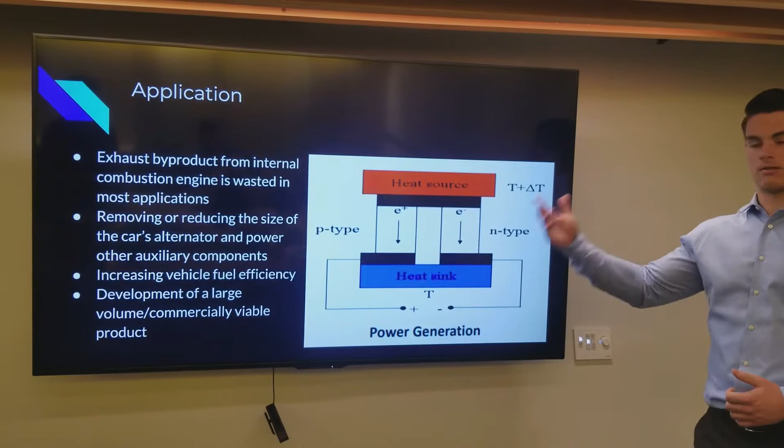So the application: there's a lot of exhaust byproduct from an internal combustion engine that's just wasted to the environment. That's a lot of heat that could be used to power other systems, such as a car's alternator. If we can use the heat from an exhaust system to power the alternator, it'll increase the vehicle's fuel efficiency.

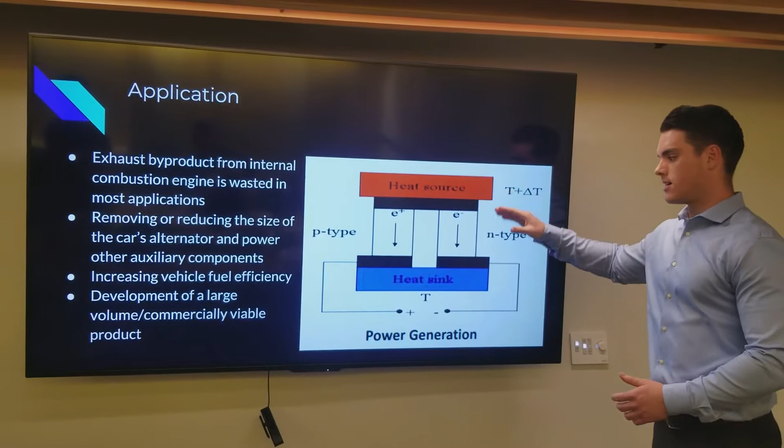It's real simple: a thermoelectric generator just takes a difference of heat and outputs a voltage. The higher the difference we can get, the more voltage we'll produce. The problem a lot of companies have run into when developing products like this is the viability of producing a large volume, commercially viable product.

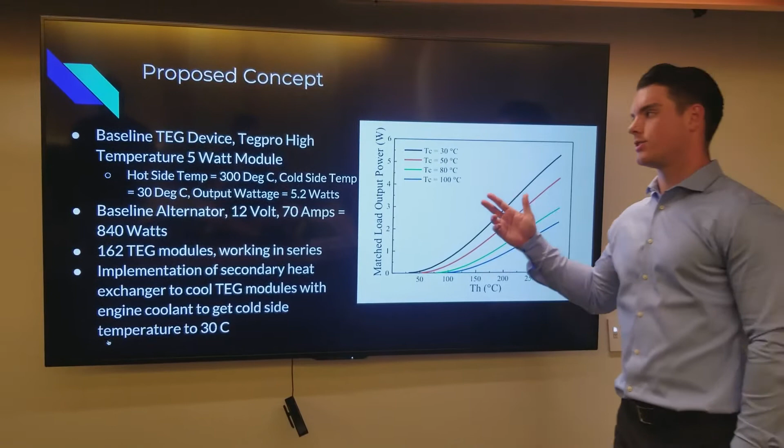Okay, this is our proposed concept. We chose a baseline thermoelectric generator device: the Tegpro high temperature 5-watt module. It can withstand higher temperatures than 300 degrees C, because we understand an exhaust system goes above this, but the highest temperature it's going to register is a hot side temp of 300 degrees C. So we went off of this for our calculations.

The cold side temp is a 30 degree estimate, and we did this because implementing a secondary heat exchanger to cool the thermoelectric generator with the engine's coolant will get the temperature down to this level. This is important because, as you can see in this image, the colder you can get the cold side of the thermoelectric generator, the more output power you get. After calculating that, we determined we can generate 5.2 watts of energy.

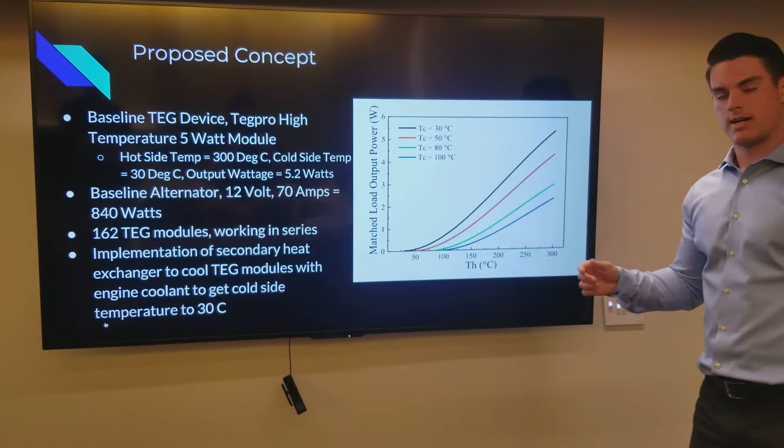We chose a baseline alternator: a 12 volt, 70 amp generator, about 840 watts, which we found from AutoZone. Using that, we determined we need a total of 162 thermoelectric generator modules working in series to get enough energy to power our alternator.

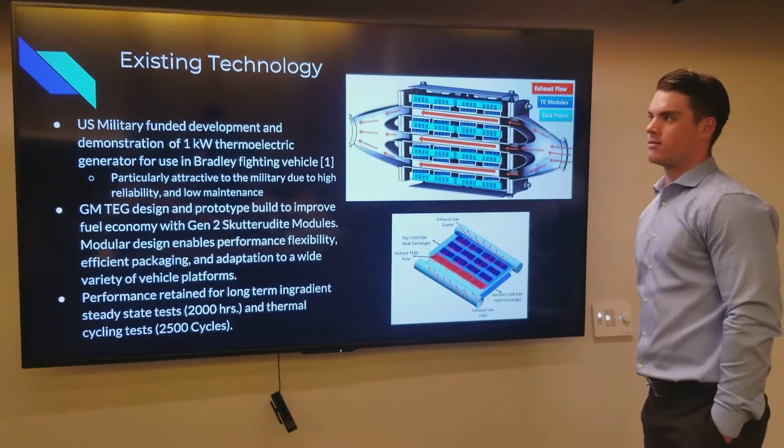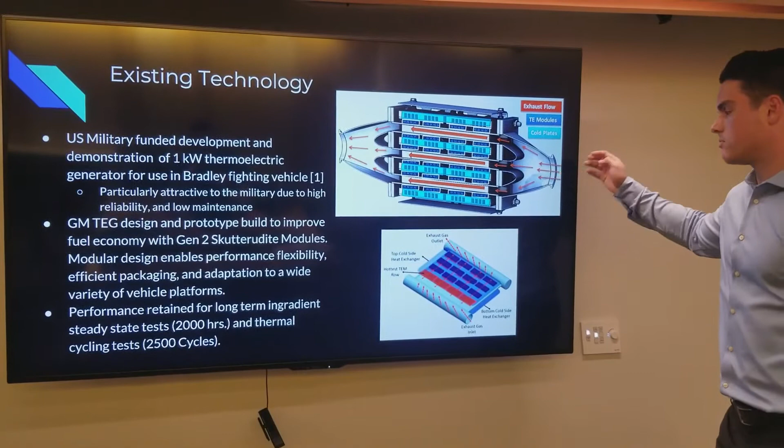Here's some background on existing technology. The top image is a US military funded and developed product: a 1 kilowatt thermoelectric generator used in their Bradley fighting vehicle. It was particularly attractive to the military because it was highly reliable and had very low maintenance. As you can see, they split the exhaust so you have more contact between surface areas of the thermoelectric generators.

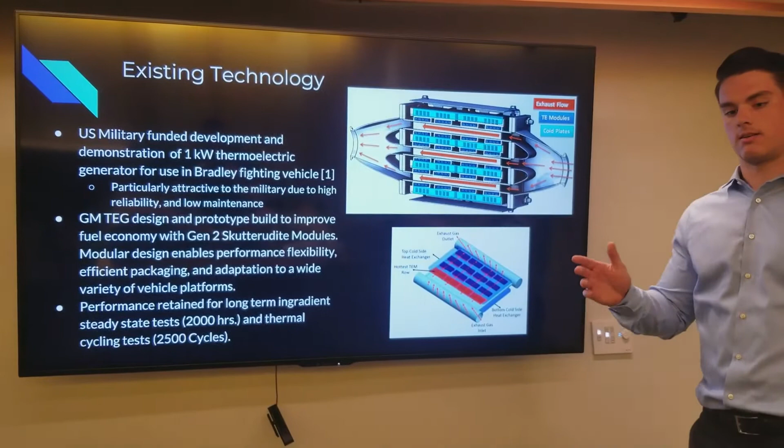Another study was done by General Motors. They did a thermoelectric generator design and prototype build, which helped improve fuel economy with their Gen 2 Skutterudite modules. It was a modular design that improved performance flexibility, gave efficient packaging, and adaptation to a wide variety of vehicle platforms. This was important because GM has a number of different vehicles, and they wanted something easily compatible with every model. This is an image of that model here.

As you can see, they followed a similar design where they split the exhaust, but it was also flexible. A cool thing is they were able to wrap the exhaust system with these to give more surface area contact with the hot side.

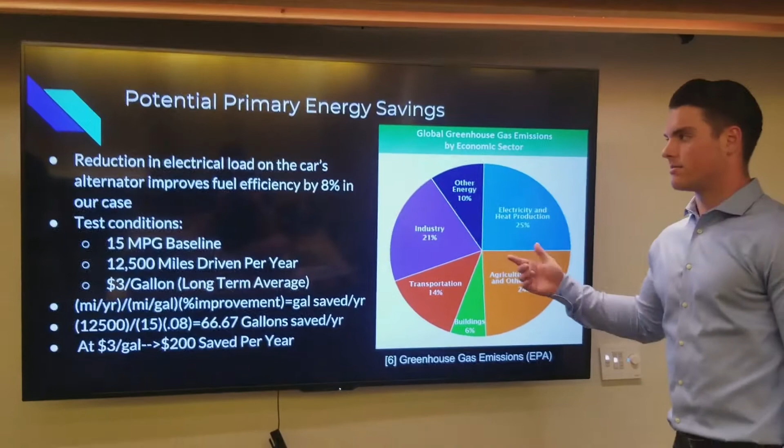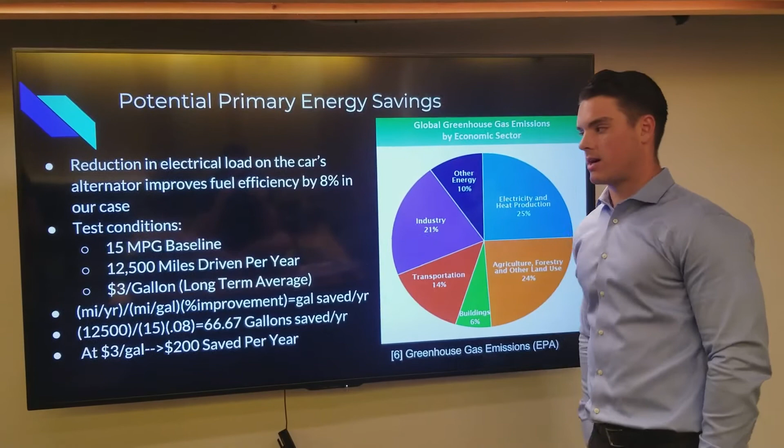So these are some calculations we started to do. Based on research we did, specifically on the US government site, we determined that reducing the electrical load on a car's alternator increases fuel efficiency by about 8%. Some assumptions we made: we used a 15 mile per gallon baseline, and 12,500 miles driven per year as the national average, while trying to stay conservative on a lot of our assumptions.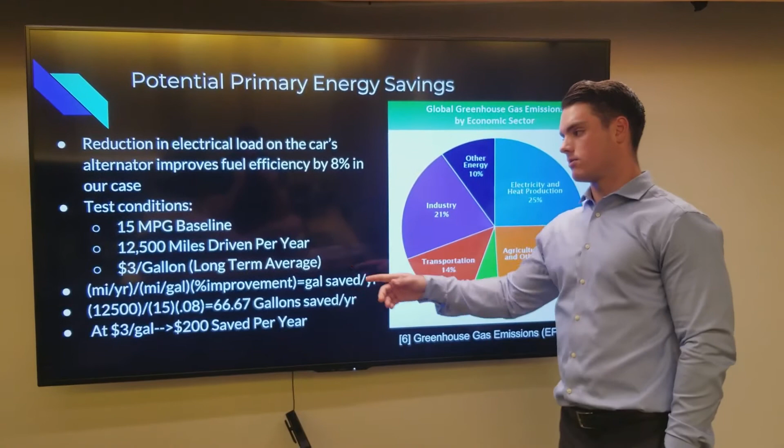If you drive more than that, you'll decrease the simple payback time and get your money back quicker. We also assumed $3 per gallon is a good estimate. The first calculation is to determine the number of gallons you'll save per year: divide the miles driven per year by the miles per gallon, then multiply by the percent improvement. We calculated you'll save 66.67 gallons per year, and multiplying that by the price of gas over the past 10 and future 10 years, we determined you'll save approximately $200 per year.

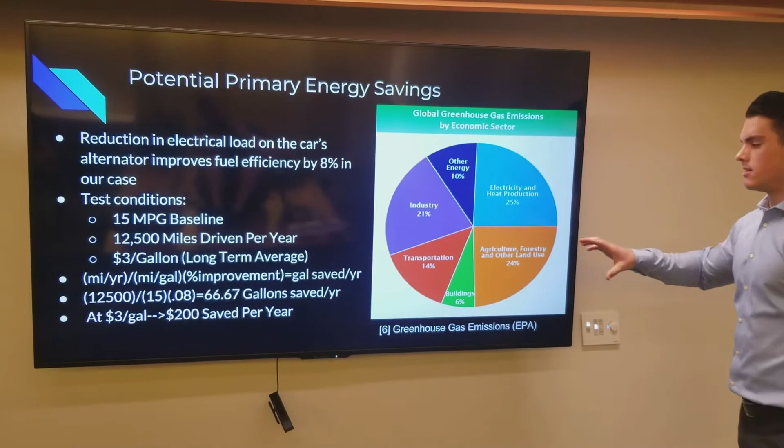This image is important because it shows the percent of global greenhouse gas emissions by each economic sector. We're in the transportation sector, so 14% of global greenhouse gases are produced by cars and vehicles driving on our roads.

In summary, our idea is pretty simple: we want to take waste heat from a car's exhaust system and use it to power a thermoelectric device. To increase our delta T, we'll take coolant from the radiator, and increasing our delta T creates the largest voltage output. With that voltage output, we want to partially relieve the alternator's load from the vehicle, increasing fuel efficiency by about 8%. We want to do further testing to determine how to decrease the simple payback period.

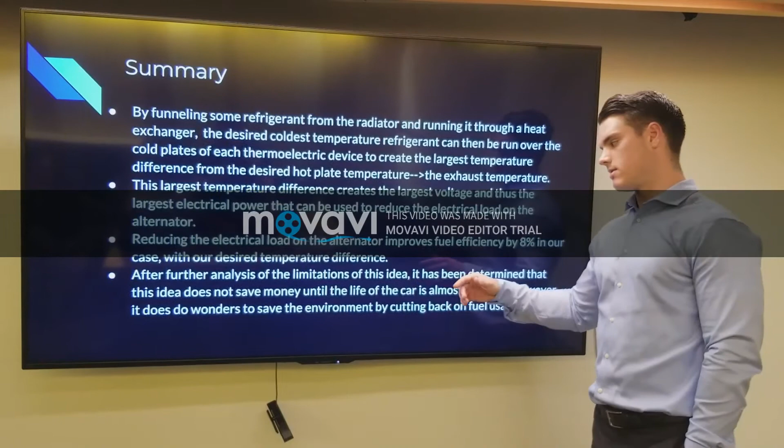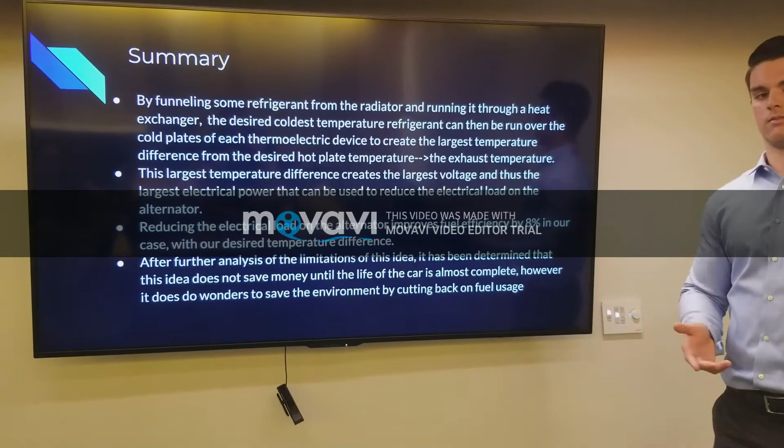From our analysis, it's been determined that this idea does not save money until the lifetime of the vehicle is complete. But we also feel it's really valuable because it does a lot by decreasing fuel consumption and saving the environment. As mentioned earlier, about 14% of greenhouse gas emissions comes from transportation, so by decreasing fuel use through every vehicle by 8%, we can do a lot to save the environment.